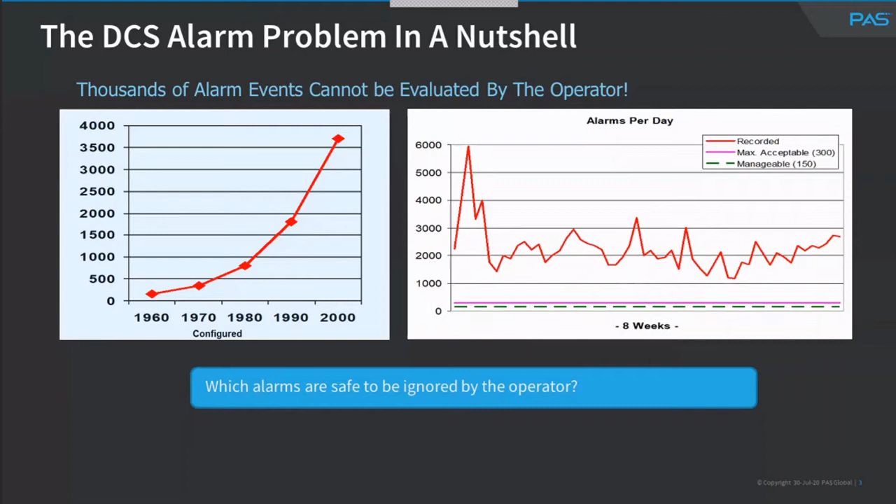Now, if you go to some control rooms in factories, you would find operators getting alarms continuously, and clearly they have no way of knowing which alarms to ignore and which to respond to. The second issue we found is that operators receive alarms at a very high rate — we call this an alarm flood. Alarm floods occur when the alarm rate exceeds 10 alarms in 10 minutes. 10 alarms is not a lot, and 10 alarms in 10 minutes means the operator would immediately start ignoring alarms 10 onwards — alarms 11, 12, 13, 14, the operator will forget about those. In this particular example data, the system was flooded for 6.9% of the time, meaning your process alarm system was not available for 6.9% of the day. That's a very, very high amount of unavailability. Typically, when we design a control system, we're looking at availabilities of 99.99%.

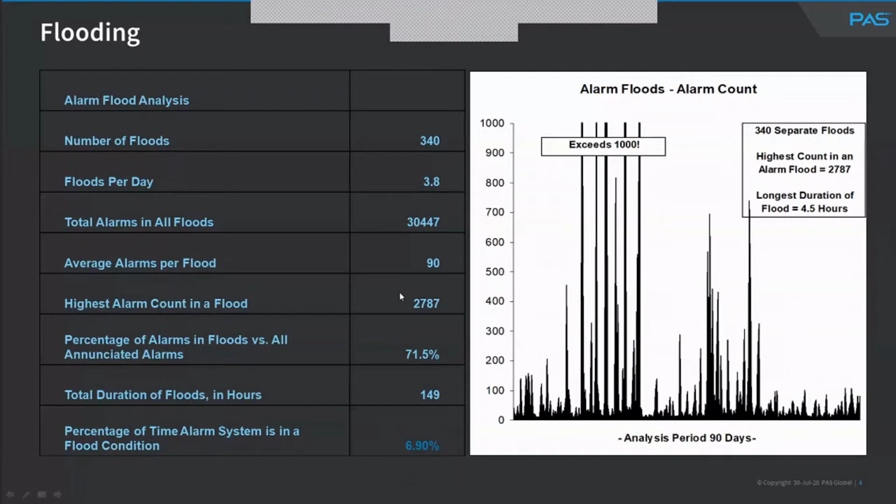In particular, it was a stale alarm on the level of the column, and we'll look at stale alarms going forward. But what we do realize is something needs to be done about this problem. Companies like PAS have been operating for about 20 years now, looking at alarm management, but the solution to the problem remains elusive. It's not an obvious solution, and it's not a solution you can put into a textbook, because it involves a lot of other factors that are not purely engineering kind of factors.

So let's get stuck into our case study, which is quite interesting. What we have here is a surge drum with the input flow to take the surge. We have a level indicator. We have a pump with the start permissive at 35%, meaning the operator cannot start the pump until the level is greater than 35%.

The pump trips at 30%. The trip was included because the expectation was that the supply flow would drop periodically more than once per annum. If a circuit is expected to operate more than once per annum, that circuit is considered a control circuit, not necessarily a trip circuit. We have a discharge pressure on the pump to tell us what the discharge pressure is, and we have a flow controller to tell us what the flow to the subsequent downstream unit is.

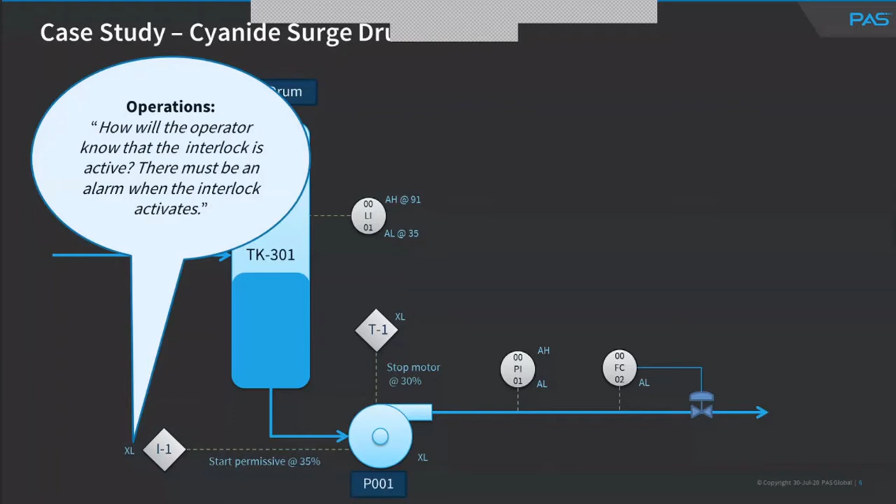Control systems will say, we always alarm at the trip point and at the highest priority. You'd find this in specifications of major oil companies, oil and gas, mining, and so forth. We always alarm at the trip point, that is what they say.

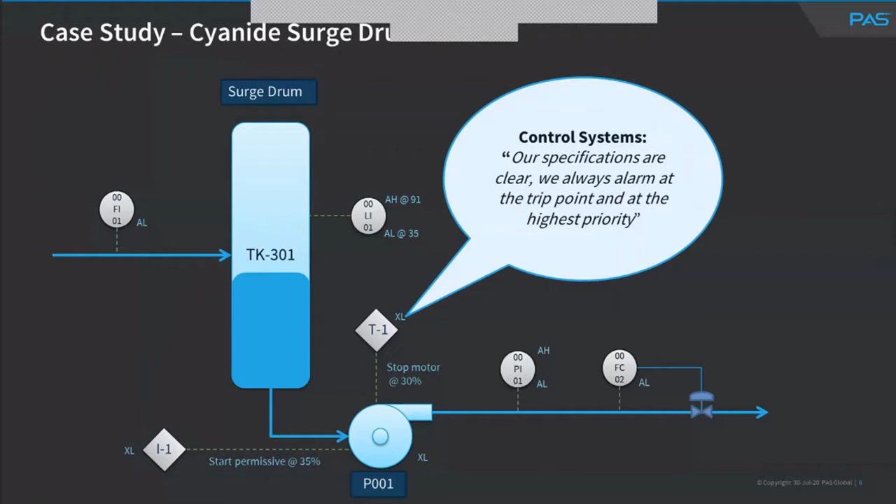The next group is rotating equipment, and they make a good point. They say the supplier of the pump has specified an alarm at 45 kPa. So we add that alarm. We cannot argue with the supplier of the equipment, of course.

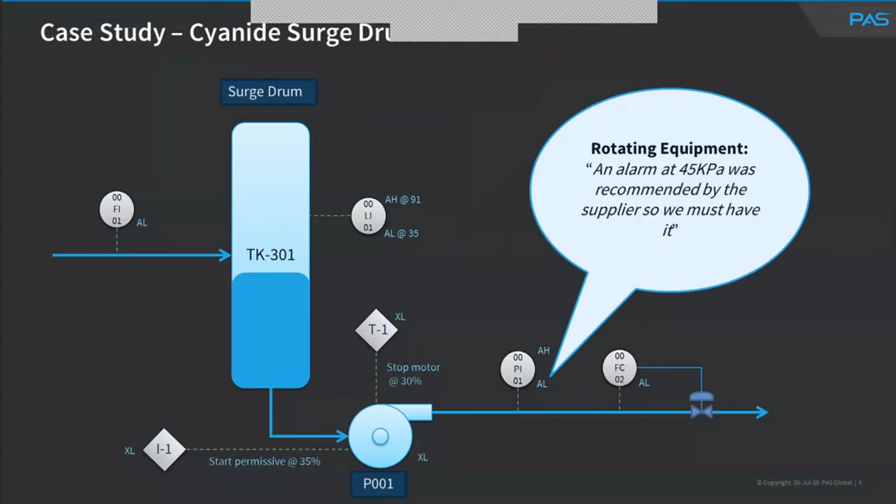And the process safety people speak of RCA, meaning root cause analysis, recommendations, where we need to have a low level alarm on the tank, and it's specified at 35%. So that alarm is included.

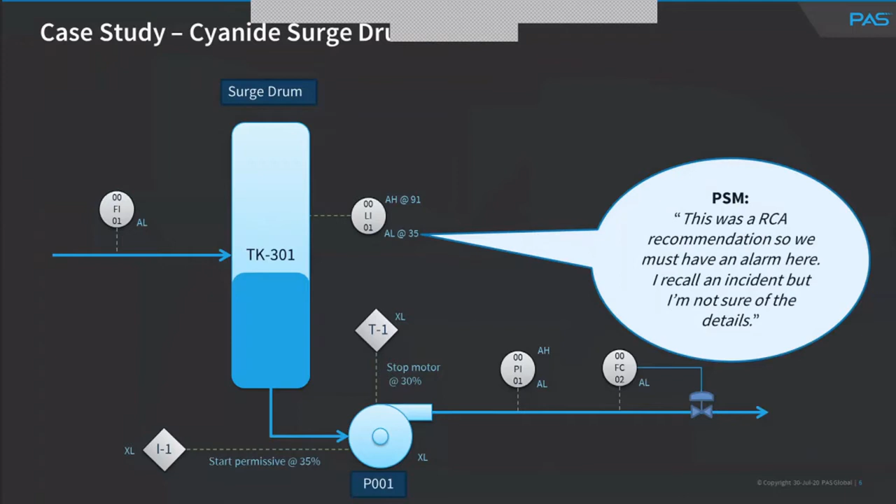And it's always the project manager that speaks last. The project manager sends an email to say, we should always have alarms on pump stops. So every one of these participants have really good intentions, in the sense that they're worried about different things and they're worried about outcomes that would actually cause harm.

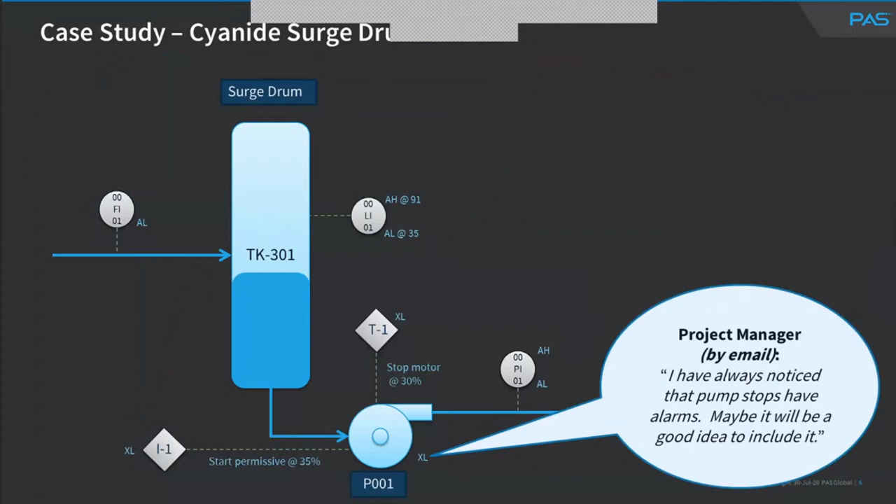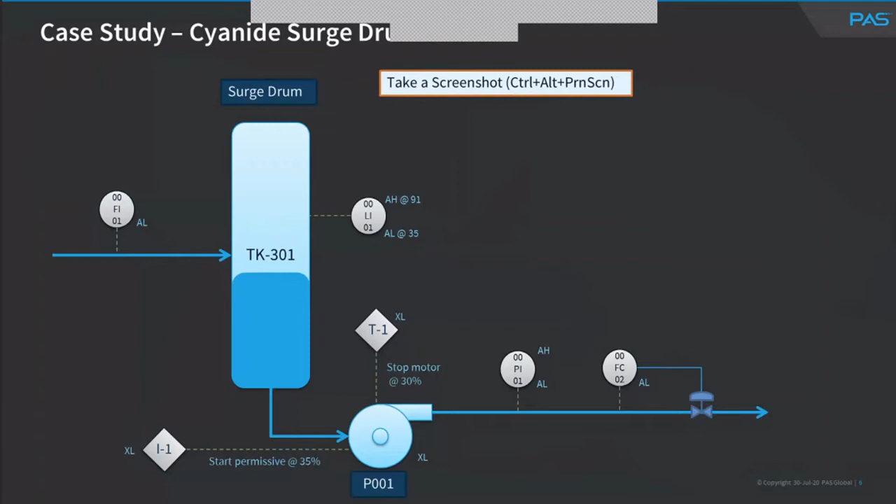So we end up with a situation like this. I advise you to take a screenshot, because I'm going to branch off into another software, a simulation software, to see the effect that this type of alarm system would have on an operator. So everyone felt really good after the study. They all slept very well at night because they believed they had given the operator all the tools needed to protect the plant.

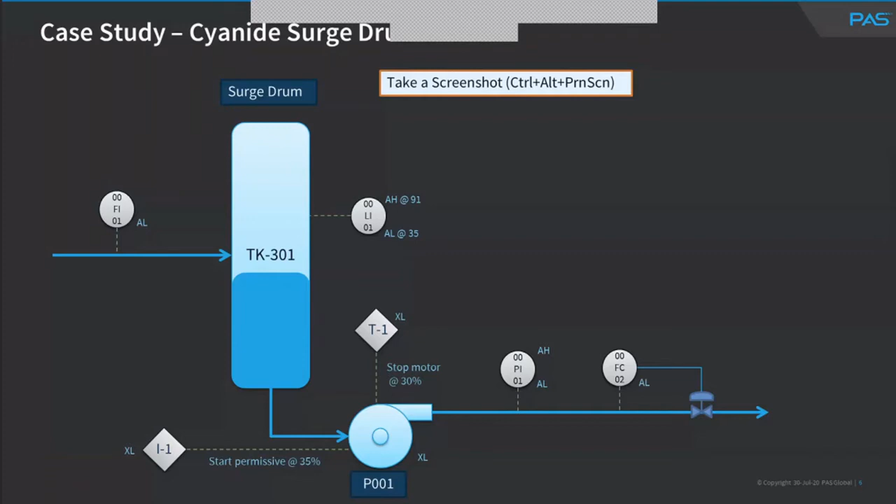So this is a dynamic simulation of the same facility. I've inserted a control valve here to shut off the suction flow. Let's see what happens when a perfectly normal condition occurs, and that is loss of supply. So the event we're talking about is loss of supply into this particular vessel.

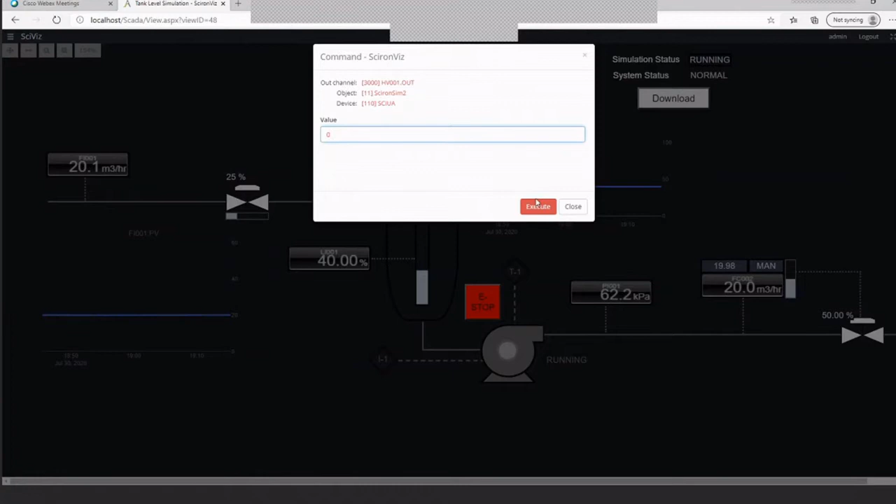So now that I've reduced the flow to zero, you would notice that the tank level will start dropping. The first event that would happen is the interlock activating at 35%. Here we go. And the next event that would occur is the pump tripping at 30%. Here we go. The discharge pressure has dropped and the flow has dropped to zero.

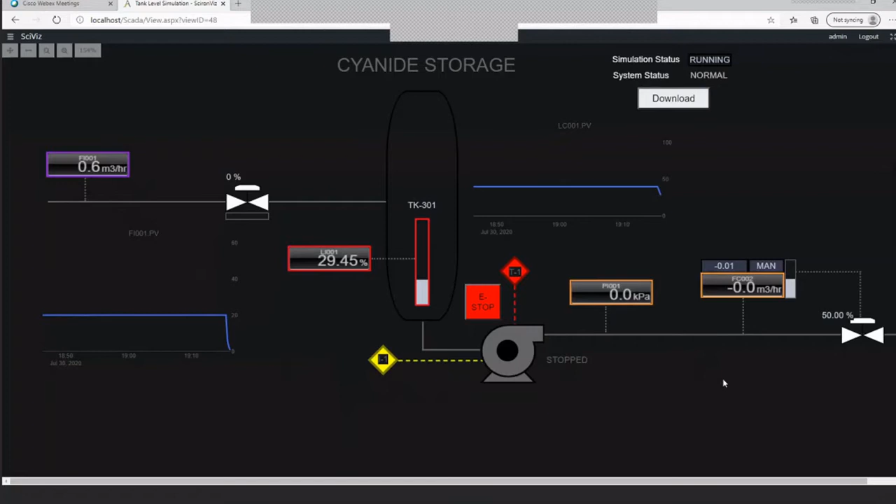You'll notice that in this particular sketch, we have 1, 2, 3, 4, 5, 6 alarms that have informed the operator that something's happened. Yet there's nothing unsafe or abnormal about this condition, because the plant designer wanted all of this to happen. Nothing that has happened so far is abnormal.

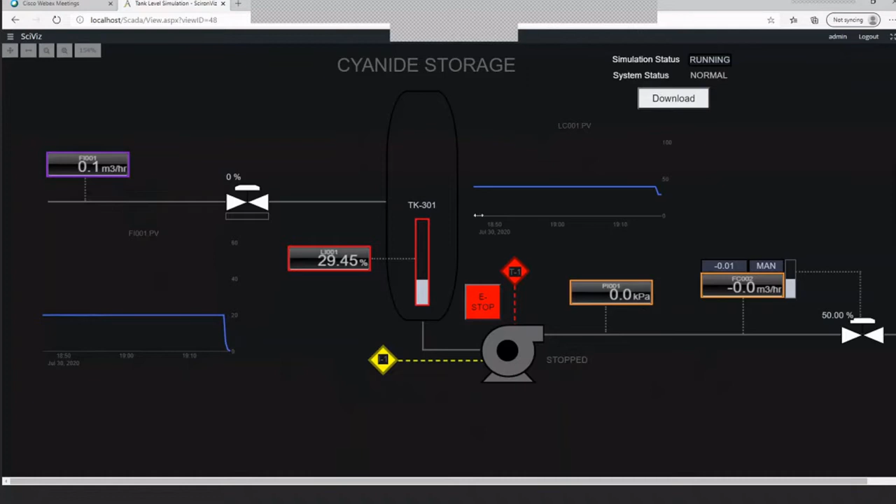If you look at the operator's alarm display, you will notice that his alarm panel has lit up like a Christmas tree. But yet, he has no actual action to take. There's zero action for the operator. All he has to do is acknowledge all these alarms.

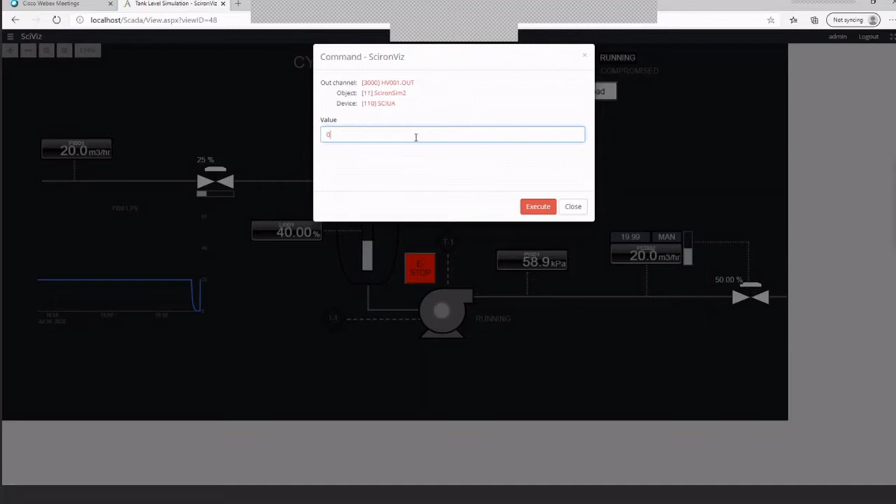Let's go back and talk about the real danger. I'm going to reset the simulation and talk about the real danger. So we rerun the simulation, but this time we have a fused relay on the pump, which means that even though the level drops, the pump does not get the stop signal and continues operating in a dangerous condition.

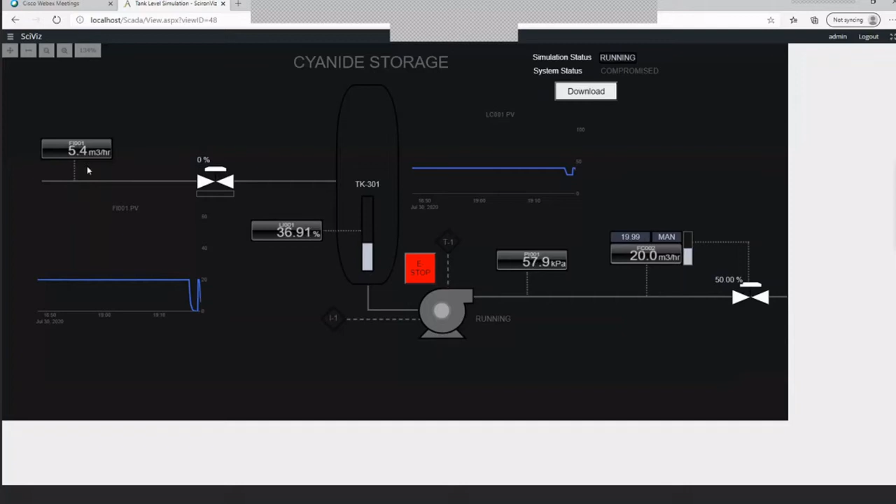So again, the moment the flow drops to less than 5%, 5 meter cube per hour, the operator is immediately worried about the downstream plant, so he would probably move off this page. And look what happens. Operator has received many alarms. Yet, because of past experience, the operator will not respond to these alarms. And the pump will run dry, creating a dangerous condition. In this case, even the e-stop will not work because it's a fused relay.

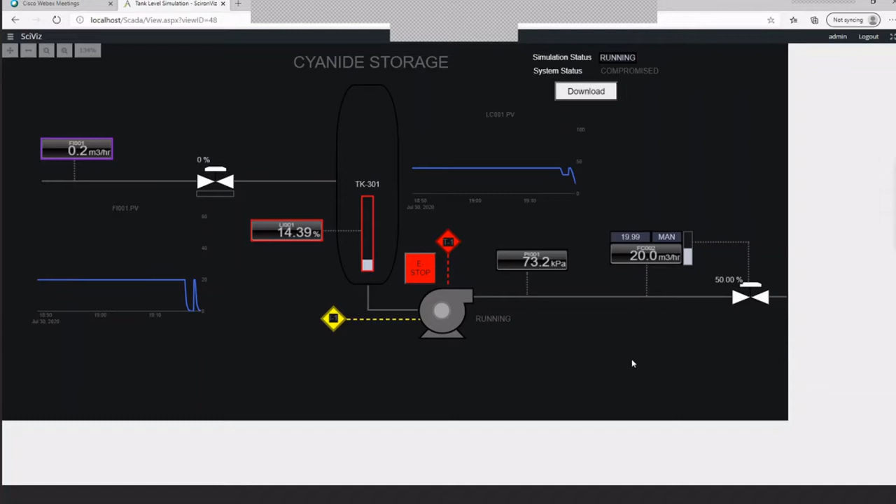So the only way for the operator to stop this is to go outside and manually stop it to prevent the incident from happening. So what we find out from this whole exercise is that even though we seem to have a lot of alarms protecting the plant, the alarms sound, but the operator has no actions for a normal occurrence. And when the actual problem happens, we will not notice it.

If you look at the alarm summary again, you would see that there's a whole bunch of alarms, yet it's very unlikely the operator will pick up this problem. So right at the end, we'll go back and revisit this issue with the correct alarm setting.

So back to our slideshow.

What lesson do we learn from this whole thing? Well, it seems like this guy, Henry George Bohn, knew a thing or two about alarm management. He says the road to hell is paved with good intention. Every single participant in the meeting believed that they're doing a good thing. And in the end, we realized that it actually did not help the operator at all.

The second point we learned is from Master Yoda from Star Wars, and we always turn to Master Yoda when we need assistance. Train yourself to let go of everything you fear to lose. Every participant believed that if they do not put in their alarm, then they would put the plant at risk, and it allowed them in isolation to sleep well at night. But what we learned from this whole experience is that alarm management is a behavioral issue. It's one of culture and less of engineering.

So if you look at the work process of alarm management, it's quite complex. There's alarm philosophy that's required. There's a whole bunch of operational activities that have to happen on a monthly basis. There's design work that has to happen. And there's periodic system audits that have to happen.

There was an operator action for the flow, by the way, but for the tank, there was no action. And most of the alarms were centered around the tank.

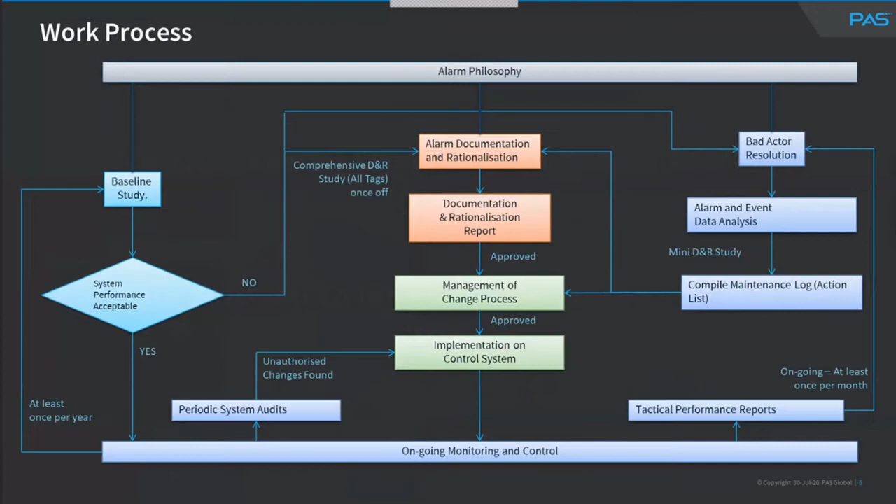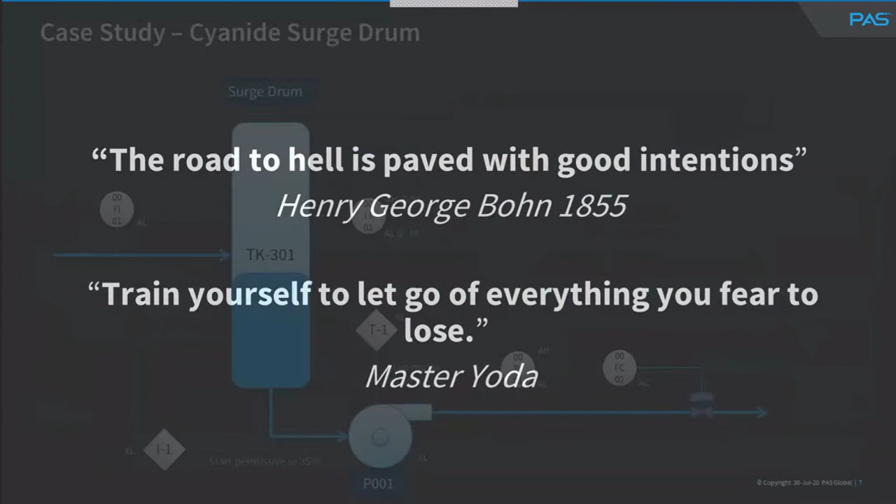Second commandment: thou shalt only alarm if the situation is abnormal. Let's go back and have a look. What was abnormal about the situation? Yes, the flow dropped - that was abnormal, and there was an alarm for that. But whatever happened after that was perfectly normal and expected and should have happened, and happened as it should. We noticed the level started dropping, the level alarm came up, but it shouldn't have come up - the level started dropping, the pump stopped, and so forth. And that's really the second commandment.

The third commandment is probably the commandment that gives the biggest benefit: you shall not duplicate alarms. No two alarms shall have the same cause event. In order to meet this requirement, you need to do some dynamic analysis to achieve this. And this is where there's a mismatch between the different safety studies that are typically done in the plants. A hazard study, for example, is a steady state analysis by and large. Yet hazard studies are often used as a mechanism to create alarms.

So let's look at this. No two alarms shall have the same cause event. So let's go back to our little example and have a look. We notice that, for example, this low flow can be caused by a multitude of factors. The first factor is loss of supply coming from the FI01. It can also be caused by this pump stopping, and it can be caused by this valve closing when it's not supposed to. So if you want to retain this alarm, you have to make a choice between the others.

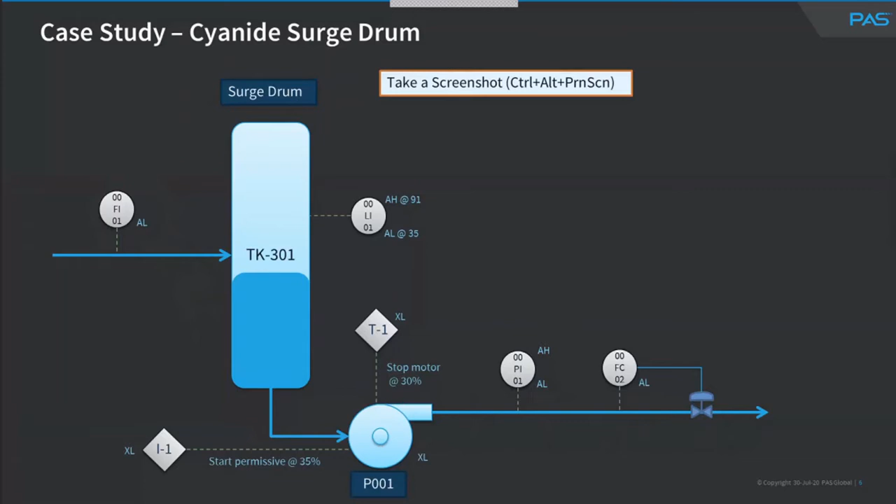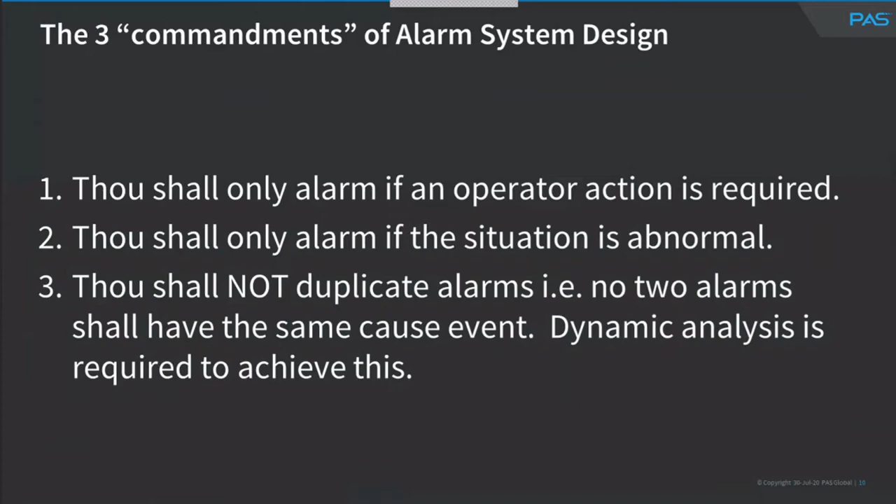In my view, the best one is the flow, because the flow will give you a very early indication that this flow will drop. Of course, the pump could stop as another cause, or the valve could close - we will discuss this in more detail. But that's how you do a cause analysis for your various alarms. And the moment you find that you do not have unique causes, you need to remove those alarms, because all they would do is give an operator two indications of the same event. And remember, we only have 10 alarms in 10 minutes in terms of our specifications.

So we can start with giving the operator absolutely no alarms, zero alarms, nothing - he just operates the plant. Guess what? There's no guarantee that he will miss every event, because he's now very vigilant, because he has knowledge that he has no alarms. It's like when I renovated my home, my alarm system at home was offline for a few days. In those few days, I was very vigilant. I actually didn't sleep much, because the knowledge that the alarm is not present makes me more focused on detecting the problem myself.

As we start adding alarms, the operator gets more information and is able to act based on these alarms that may come up. This is because the operator has so many points to look at that it's not possible for him to watch the entire factory, so we would start assisting him, and the chances of the operator missing a key event start dropping drastically. And we reach an optimization point.

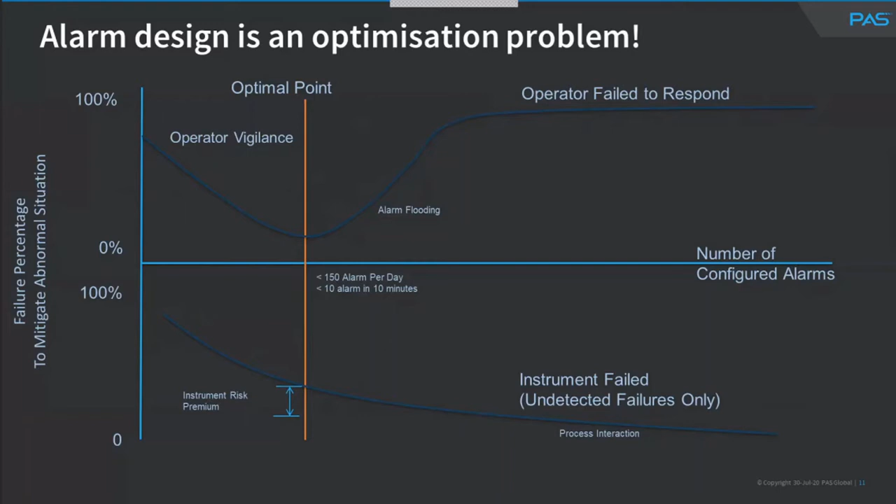I hope that I have given you guys a flavor for what alarm design actually is. It's an optimization problem where we're trying to minimize the number of alarms subject to certain constraints.

If you know all of this, why do we still persist and have this alarm problem? I often do this with many of our clients: we use a strategic framework to try and sort this problem out, as opposed to a pure technical framework. We find that many people's first go-to is software. They say, let's buy some software to sort this out. My view is that software will help, but it's not the solution. This problem is about understanding the culture of your company.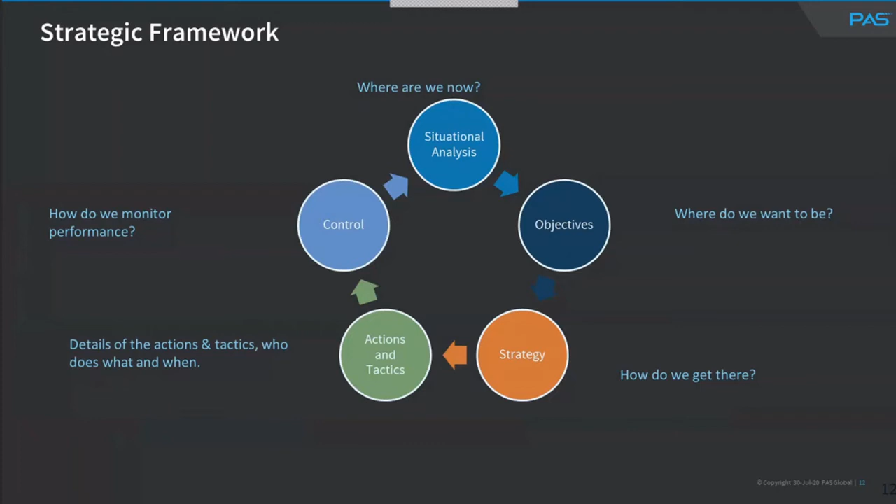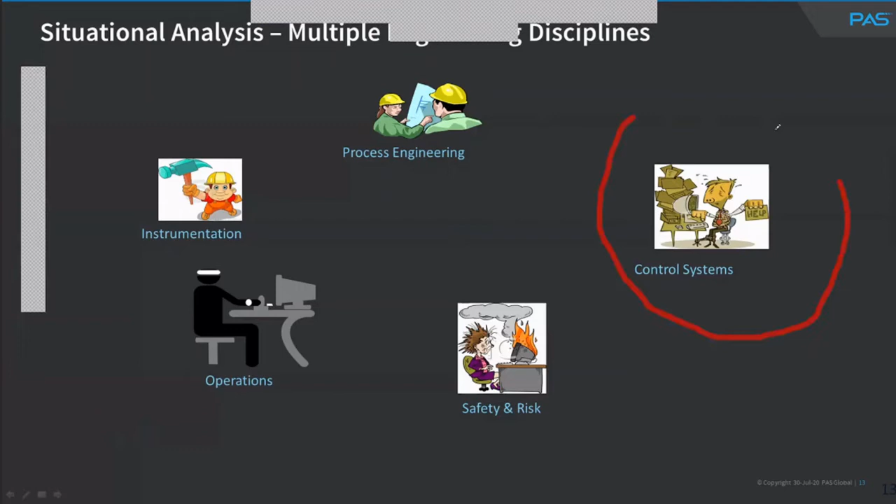Let's talk about what we mean by situation analysis. Let's understand the environment we work in. We work in a multidisciplinary engineering environment. Yes, the problem seems to manifest itself on the control system - that's where it manifests itself. But the problem is actually a result of decision-making from many different areas: process engineering, instrumentation, operations, and safety and risk.

Each discipline wants to protect their own interest. No engineer or technician wants to be responsible for an accident by omitting an alarm, so they will all insist that they have the alarms in. Against that background, in order to solve this problem, we cannot just be control systems and instrumentation - it has to be a multidisciplinary approach. So that comes out of your situation analysis.

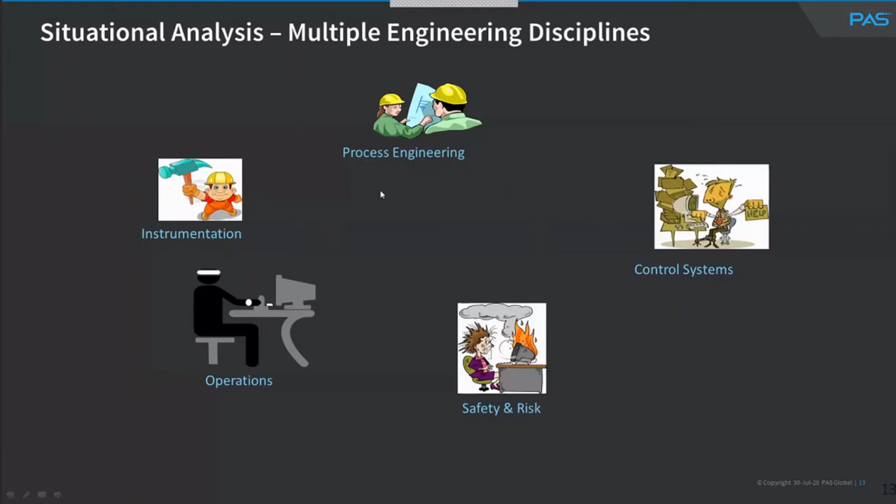The second point is about operating culture. We often find that operations typically ignore alarms with zero consequence. They disable alarms without addressing the root cause. And probably the worst effect is to wait for alarms to occur before responding.

I had this experience at a factory in Saudi Arabia, where the operator would set all the levels on the columns at 45 and 55%. So I asked him why he does that. He says once he does that at the beginning of the shift, he then waits for any level alarm to come up, and then he acts. That is not the correct use of an alarm system.

Because what happens in reality is that when you have a transient that runs through the factory, all the levels move. So instead of having one level alarm, he has about 50 of them to deal with. Alarms should only annunciate when the situation is truly abnormal or the underlying equipment has failed.

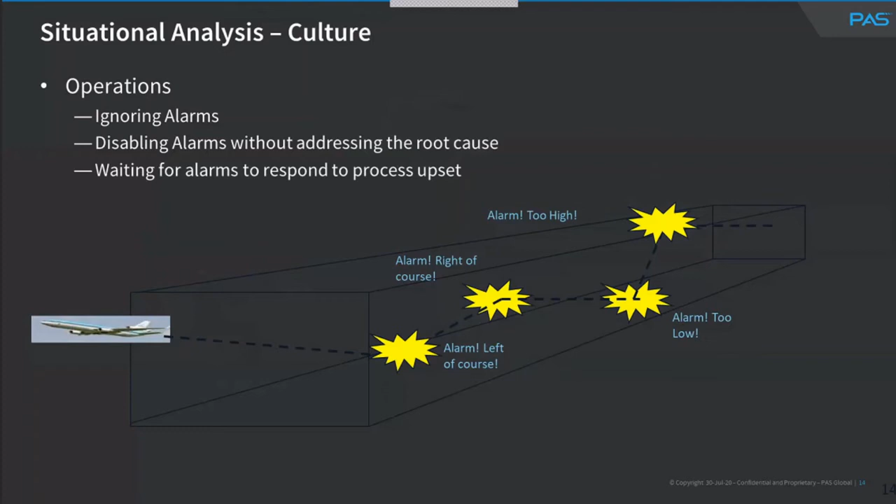Okay, so let's talk about the process department. The process department has a knack of adding alarms during risk review. They do this without realizing it, because in a risk review, like a HAZOP meeting, the easiest thing to do is to say 'safeguard, add an alarm.' It's probably the easiest thing to do. They tend to duplicate alarms.

During incident investigations, they would add alarms because you have to put something down in an incident investigation. So you just add an alarm in there because you have to have some recommendations, and it doesn't cost anything, it's cheap, and so forth. And in doing so, they're creating this problem, and they set activation points that don't make sense.

And finally, with control systems - control systems are not set up with deadbands and delay timers. There's configured duplication, and range settings are all off. So the problem originates from multiple different people.

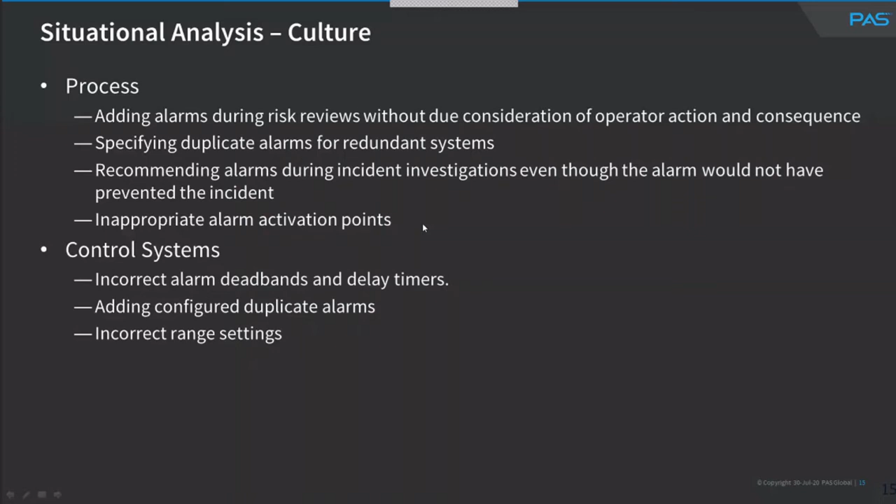In terms of our objectives, I think the objective is very simple: reduce the annunciated alarm rate per operating console to an acceptable limit as specified in EEMUA 191 and ISA 18.2. Those two specifications really tell us where we need to be for safe operation.

And we need to bring about permanent change in the engineering and operating culture such that the gains are maintained in the long term. In the short term, I can reduce your alarm count like you won't believe, but unless your culture changes, those alarm counts will not be sustained. The problem will return in a few years, and some companies have been grappling with this for 20 years plus - that's because the operating culture has not changed.

If you look at our strategy, it's basically very simple. We have alarm system design, which we discussed. We have bad actor alarm maintenance, which we are going to talk about today in more detail, and we have training and awareness.

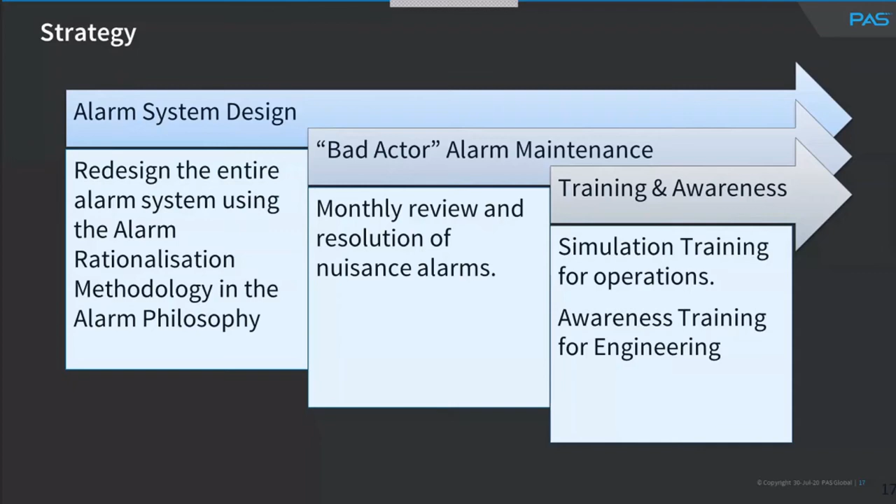Who are bad actors? These are some of the bad actors that I know. Alarms are repeatedly annunciated without conveying any new information to the operator. That's the definition of a bad actor.

So why are bad actors so bad for us? Bad actors are bad because they create a culture where the operator acknowledges an alarm without actually doing any form of analysis or corrective action. It becomes a norm to just acknowledge alarms. And you notice on the operator's panel, the acknowledge button is the one that's worn out. It's literally worn to the bone where there's no keyboard left. And that's because the guy has received so many alarms that he has no way of solving the problem.

The DCS loading will increase, or PLC bandwidth, and critical alarms are lost in the sea of bad actor alarms. So in our case, we had alarms, but the critical one, nobody noticed. And you can have some adverse consequences with regard to environment and safety. So there's a real issue with these bad actors.

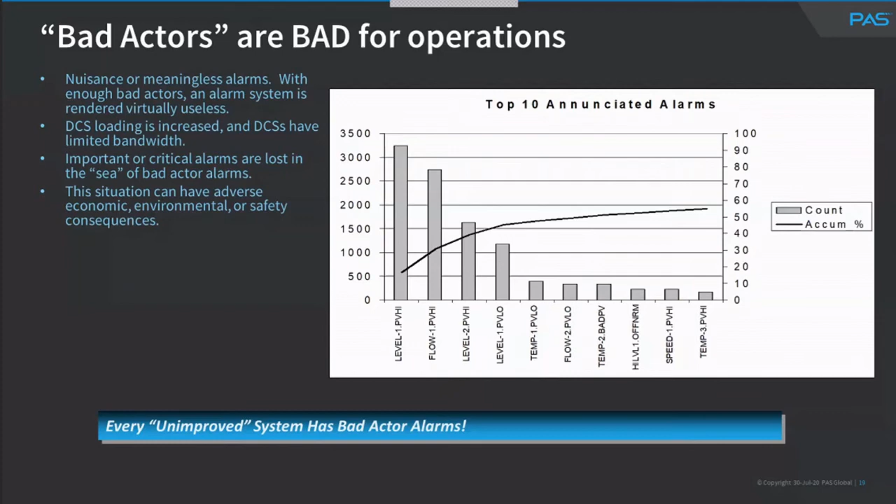Where do bad actors come from? I'm a fan of Bollywood, not Hollywood. That's just the way it is. But yeah, we get some bad actors from Hollywood.

Control system configuration is one of the issues. Process design, the second point, and instrument malfunction. And I often get annoyed when it comes to process design, because you cannot alarm your way out of a bad design. If the vessel is too small for the holdup, the alarm system is not going to help you. You need a bigger vessel or a smaller pump or whatever else you need, but the alarm system cannot solve that problem.

And of course, there's instrument malfunctions that will contribute to this. And because instruments are electronic in nature, they have the potential of generating millions of alarms, for example, on a loose connection.

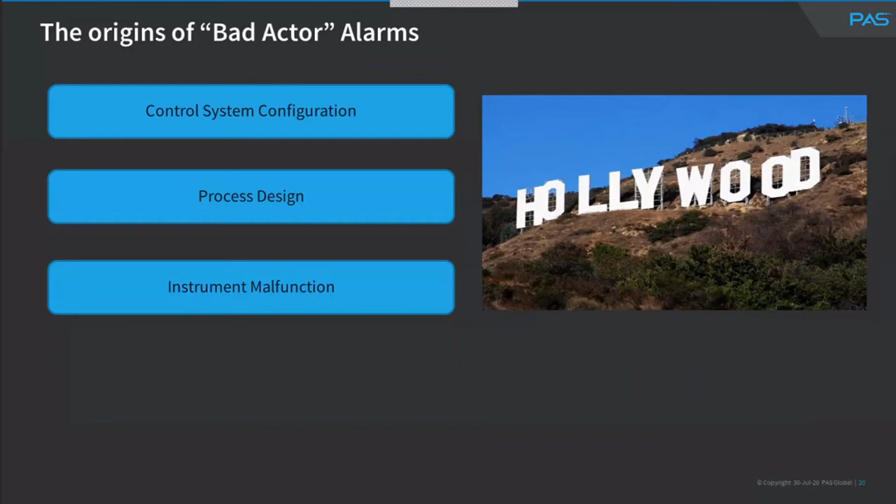Let's talk about the different types of bad actors. So the first type is a chattering alarm. The definition of chattering is an alarm that annunciates more than 3 times in 1 minute. It's very unlikely, unless you're flying a fighter aircraft, that the process would move at that speed. Most processes would not move to generate new information in a minute.

We have fleeting alarms. These are chattering alarms that arrive and go away and seem to come back the next day and leave us again and come back a month later. We have a thing called stale alarms. These are alarms that stay in the alarm log for more than 24 hours. We have duplicate alarms that are configured and duplicate alarms that are dynamic.

Duplicate alarms do not convey new information, hence must be removed. Then we have diagnostic alarms. In today's world, with the technology that we have, Foundation Fieldbus, we have smart instruments, and they have a potential of generating thousands of diagnostic alarms. While those may be important for the instrumentation people, for the operator, they are meaningless and should be sent to different people.

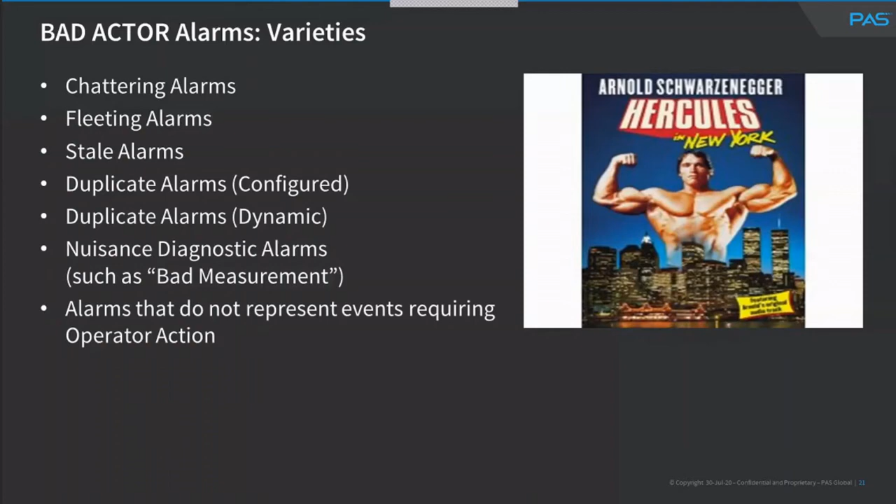And alarms that do not represent events requiring operator action. If there's no operator action, there's no alarm. And that is the first commandment.

So how do you go about addressing a bad actor problem? We've broken it down into a few steps. The first step is you need to analyze your alarm journal. And out of that analysis, you would get some kind of identification of the bad actors. That's a list of actions that you are going to take to fix the problem.

The reason you would use software is because analysis of this journal can be quite tedious and time-consuming. It's always good to have handy tools to actually help you analyze this data quicker. We don't have endless time to do this. There's a limited amount of time to do this. So we want to do it as quickly as possible.

Once we have identified these bad actors, we add them to an action item list. And that action item list is subject to review at a multidisciplinary forum. That forum includes instrumentation, control, process, mechanical, and whoever else is needed. And in that forum, we hone in on the root cause of this problem. We then get the modifications approved and implemented.

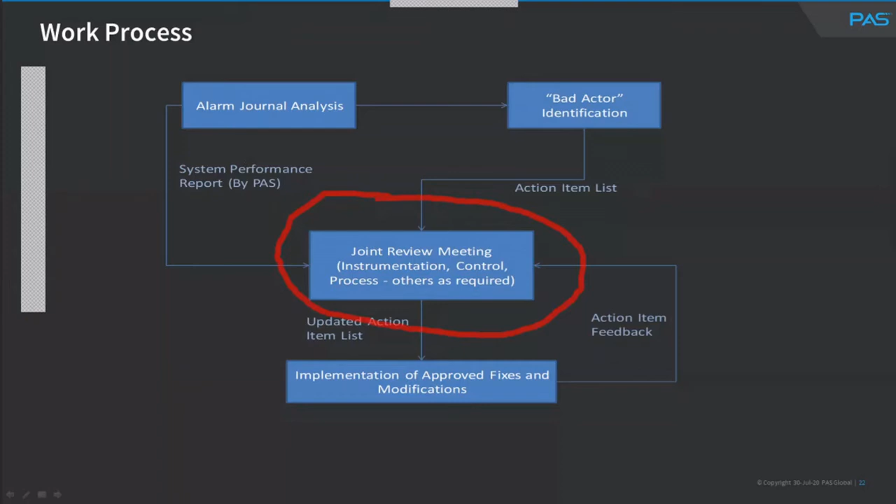The most important thing about this chart is that once an item enters your action item list, it's not allowed to leave until you've done something about it. Many companies run action lists daily or between shifts, and if an alarm isn't a problem anymore, that item gets removed from the list, only for it to happen again at a future date. The moment you detect a tag as a bad actor, it has the potential to become a bad actor again, so you need to address it once and for all so it doesn't happen again.

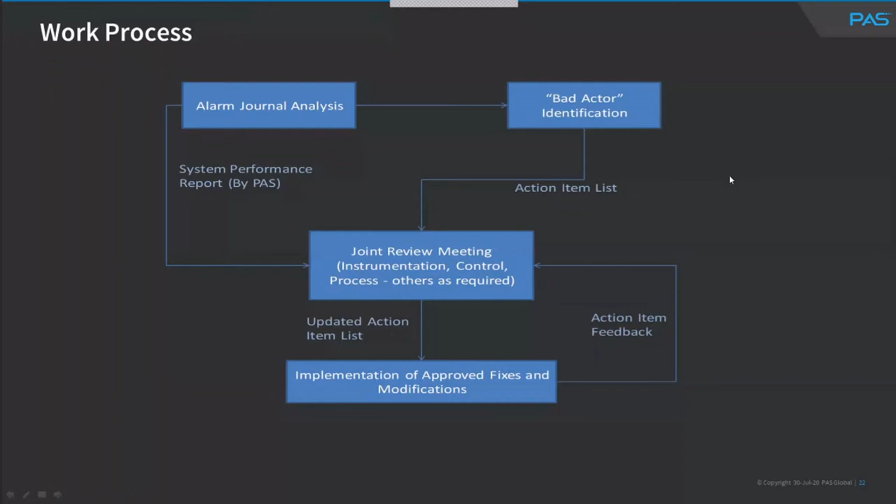Let's discuss how you classify bad actors. First, you need the event data from your DCS: when the alarm occurred, how often, and so forth. But just looking at that isn't enough. You need historical analog data to understand the context under which the alarm was generated, equipment data sheets to understand the consequences of that alarm, and the process design, because that tells you whether the alarm resulted from poor design or instrument malfunction.

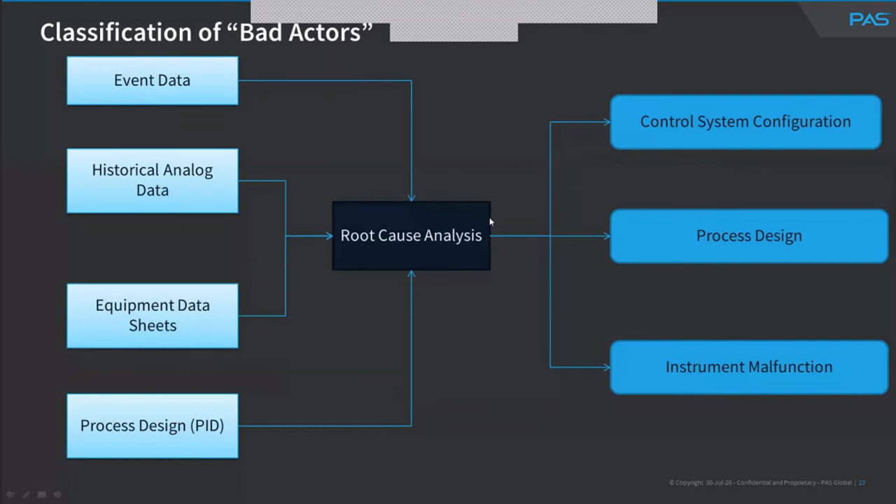Once you've done your root cause analysis, the action is then assigned to the different teams to resolve based on what the root cause of the problem is.

Chattering alarms are considered the worst offenders. The solution for chattering alarms is well documented and well known: you need to assign a proper deadband, delay time, process value filtering, and so on.

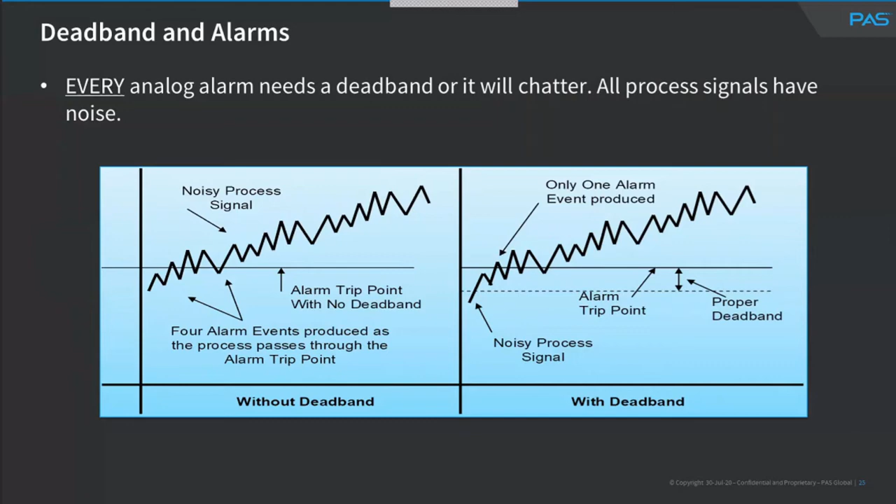Let's look at some cases, starting with the deadband. Without a deadband, the operator will get maybe four alarms for the same issue. With the deadband, the operator gets just one. It's as simple as that. By default, deadbands should be configured on almost every signal in your factory, and this gives a big benefit. But a lot of factories are dated, so you have to go back retrospectively and apply this.

Let's talk about the alarm point. There are two reasons to specify an alarm point: operational efficiency and equipment protection. We're only going to talk about operational efficiency today, but equipment protection is just as important.

First, we need to confirm that the measurement is self-regulating for load and servo responses. What do I mean by that? If you have an integrating signal, like a level, it will never achieve steady state except if it runs at a constant increase or decrease in velocity. So we're talking about things like flows and pressures. We have to verify that the signal at steady state is normally distributed - this doesn't apply to signals that aren't normally distributed.

We then calculate the mean and standard deviation of the signal at steady state, a standard statistical tool. The alarm point should be at least three standard deviations from the mean, because we want to minimize false positives to less than 1%. This is a little recipe for deciding where to set the alarm point for operational efficiency. I say operational efficiency because often the alarm point has to be set very close to a limit in order to achieve maximum production.

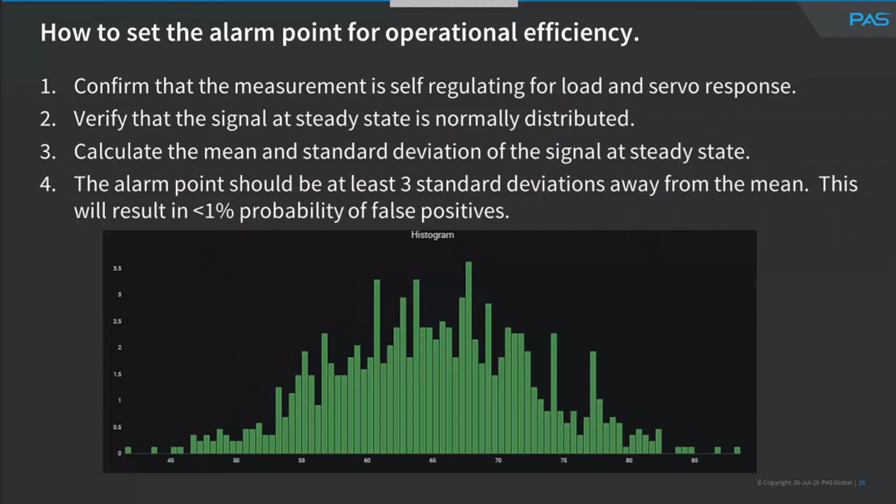For switches, we don't have deadbands, but we have delay timers, and that's all you need. The delay timers are very effective at minimizing the alarm. There's a standard table in EEMUA and ISA 18.2 that gives you the dead time and deadband amounts - I normally just use the defaults unless there's a reason not to. I don't believe there's a reason to do rigorous analysis to figure out the delay time.

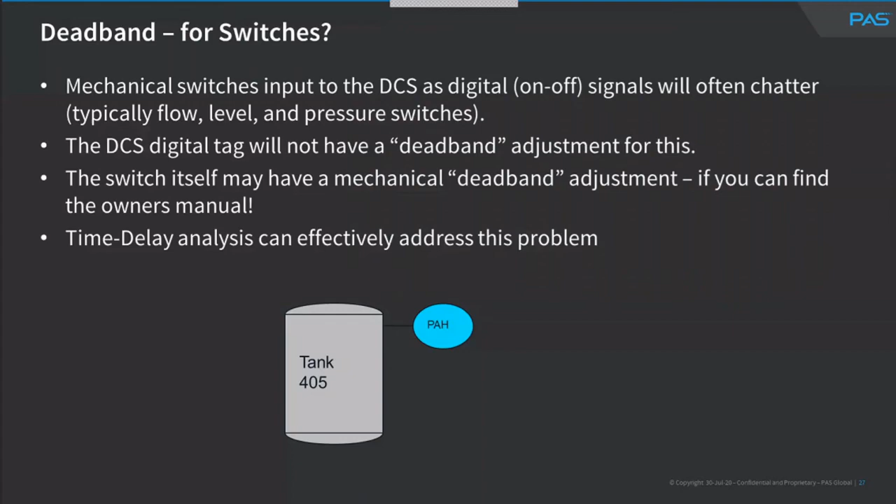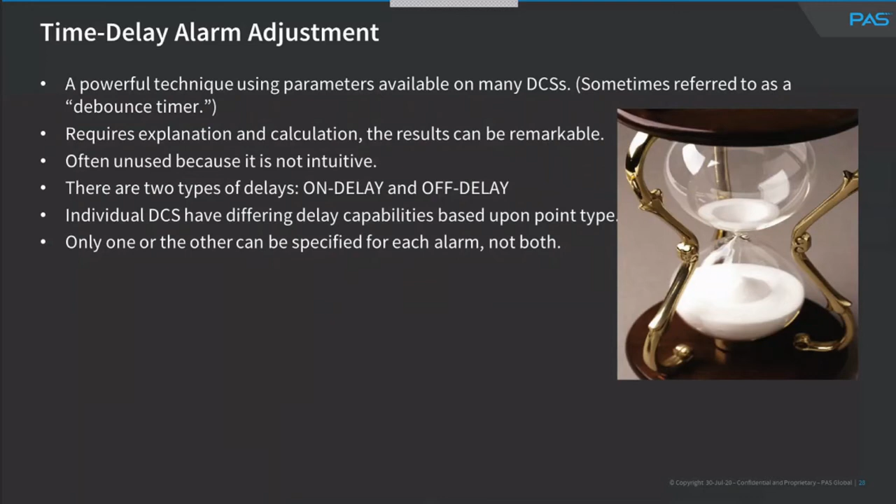Let's talk about process design. This is an actual example of a real situation where a root cause analysis study suggested we have a flow alarm for low flow on this line, because they needed a constant sweep off this line.

If you look at this carefully, the action of the controller will move this valve up and down and create much noise in the flow signal because the flow is dependent on the variable orifice that's here. What ended up happening is the operator of the plant had literally thousands of alarms originating from this tag and simply disabled the alarm. In disabling the alarm, he disabled all the recommendations of the root cause analysis of this particular problem.

What I'm saying is no amount of deadbanding can fix this. This is a process design issue. It can only be solved by a process design change. Assigning alarms where the operator has to act every minute is ridiculous. The correct solution to this problem was to clamp the valve output to not close less than 3%,

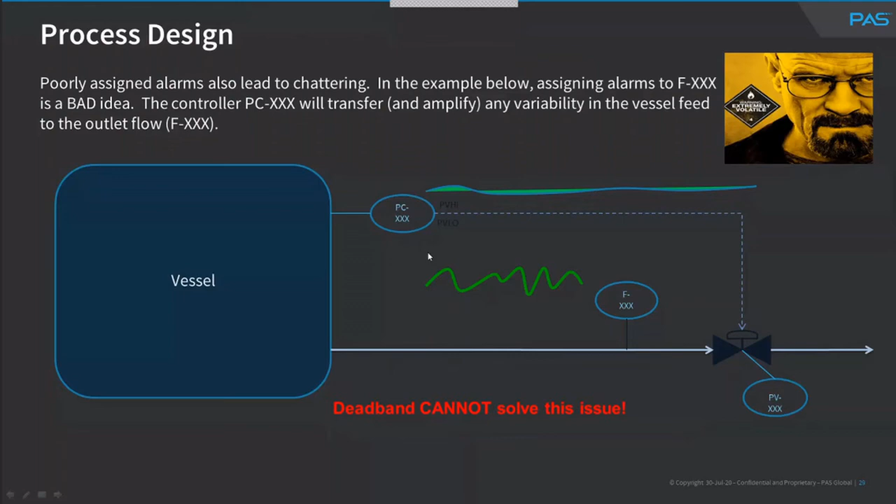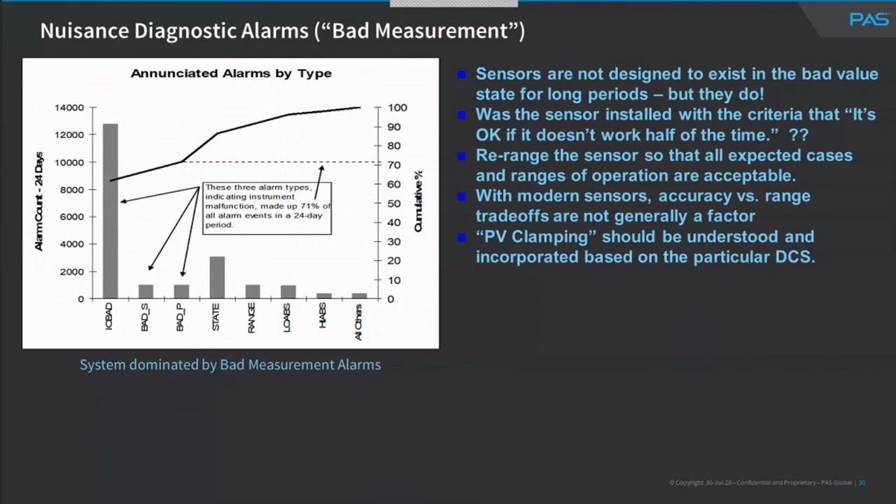Let's talk about nuisance diagnostic alarms. I'm going to skip this slide because it doesn't convey much and go to the next one, which is interesting. People ask me, why do you get so many alarms in shutdowns from bad instruments? It's a result of a simple physical property of gases. You see, when we measure flow, we have a restriction orifice and a differential pressure measurement that's subject to a square root extraction.

When the plant is off, the sun is shining and heats this side of the pipe, the gas will move that way, end up here, creating reverse flow. And that sends the instrument to produce a signal that's less than 4 milliamps. In fact, it drops below the setting that the DCS vendor or the PLC vendor has specified to detect a wire break. So it may drop to 3.3, 3.2.

Most control systems have a low cutoff at around 3.5 milliamps. This problem is easily solved. You need to adjust the cutoffs or re-range the transmitter to cater for some reverse flow. Because of the square root extraction, this signal is really jumpy.

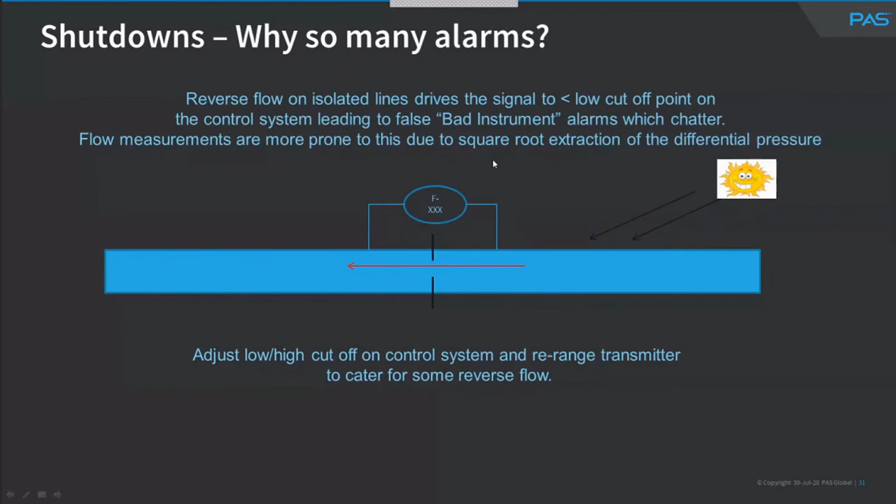Let's look at configured duplicates. In the control system, there's much programming and information is transferred from one point to the next point to the next point. You need to be sure to disable alarms at every step. Because when this guy goes into bad alarm, this guy will also go into bad alarm and so forth. So you end up giving an operator 10 alarms for something that actually is just one issue. I think that's where the control system people need to take responsibility and sort out the control system.

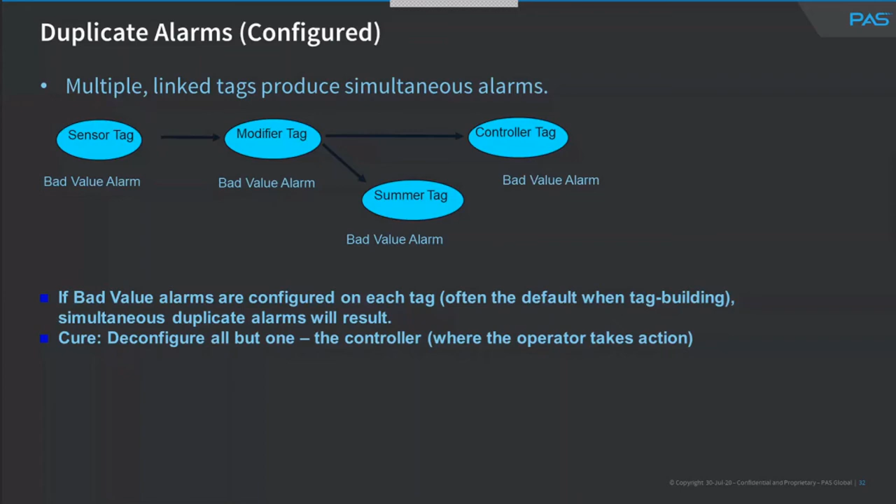The stale alarm is probably the most damaging and dangerous of all bad actors, because once an alarm goes stale, it cannot convey new information. So in the explosion I mentioned earlier, the level alarm went high and the operator continued to fill the tower. In doing so, because the level alarm was already high, he did not realize how high the actual level was. If an alarm is in your alarm log for more than 24 hours, it's violating the basic principle of alarming. It means that that's not a truly abnormal situation.

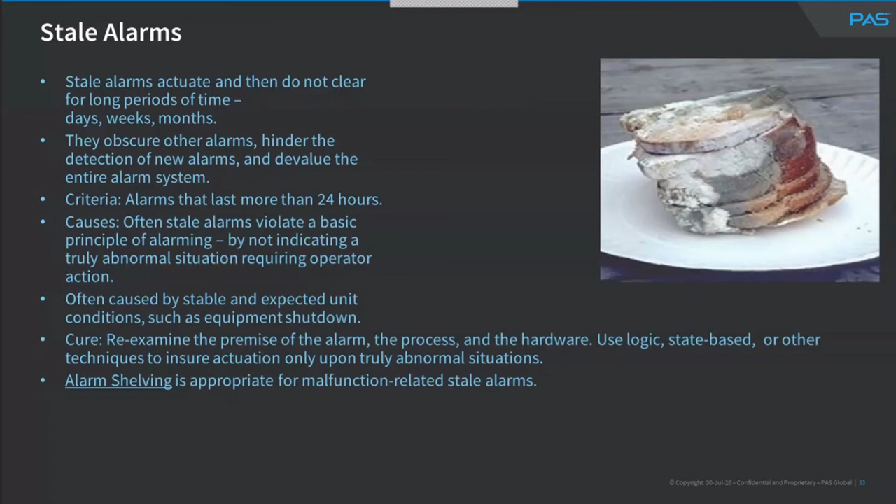If you can tolerate something for 24 hours, it's not abnormal. This is where you need to put some real effort into getting rid of stale alarms, because these alarms have caused quite a few accidents. Let's look at redundant equipment. I think the issue here is we expect the second pump to be not running for long periods of time, because that's why we have it. It's a standby.

So instead of causing stale alarms for your operators, consider doing something simple, like using a change of state alarm. In other words, when we change from running to stopped, that alarm will not become stale. Use logic functions. Here we're worried about this motor, but we're worried about less than one running, as opposed to each one having an alarm. Look at command disagree. Command disagree means if I've commanded this motor to run and it's not running, it will generate an alarm. Obviously, if I've commanded it to stop and it is stopped, it will not generate an alarm.

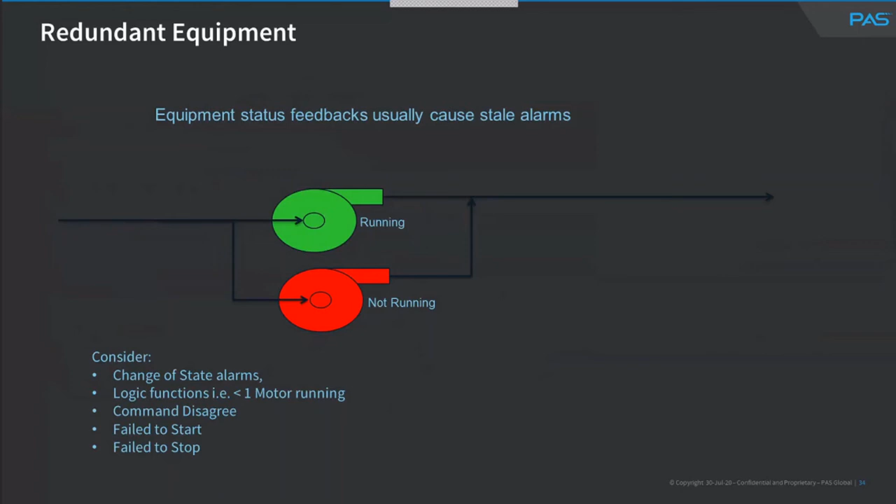And fail to stop and fail to start. Many operators use abnormal alarms instead of change of state alarms. And that really causes a lot of stale alarms in your plant.

If you follow proper methodologies and follow the work processes that we know work, you can achieve reductions of 50 to 90% in your plant. But it cannot be done unless you have a multidisciplinary team tackling the problem. I don't think people should feel that they are the only ones that need to do it, especially the control systems people. Often the problem ends up in control systems' hands, but it's actually not a control system problem.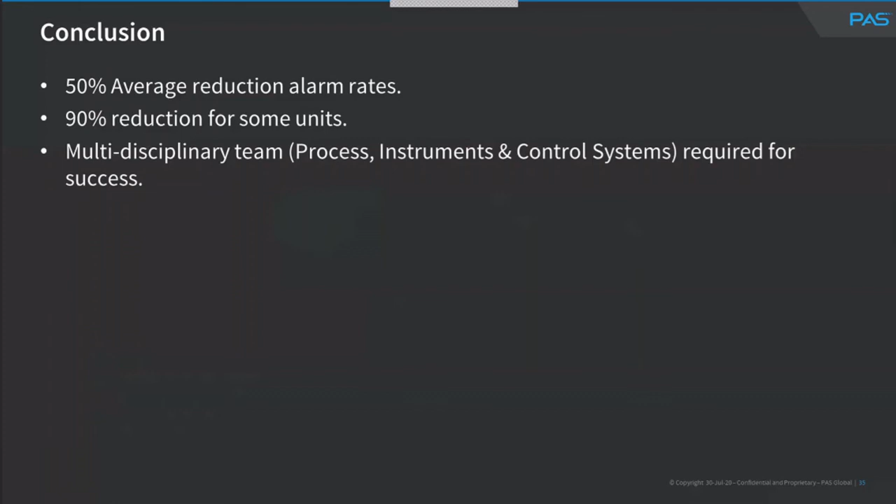So really that's where we are. Let's get back to our case study and look at the surge vessel. So after a bit of thought, we'll adjust these alarms. The first one that we need to adjust is the level indicator.

We'll adjust the level indicator to configure the alarm at only 26%, which is below the trip point. Does that even make sense? Well, it makes perfect sense, because it's a diagnostic alarm that if this pump does not stop, it will sound. You must remember, the moment the flow alarm sounds, the operator knows the level is going to drop. It has to happen, because if you're not putting mass into a vessel and you're taking mass out of a vessel, the level has to drop. It's science. It's conservation of mass.

How about the start permissive? Well, why do we need that unless we're trying to start the motor? When the operator is starting the motor, he will look at the graphic and he will see that the start permissive is either healthy or not healthy, and he will start the motor. Start permissive has zero value. There's no operator action to be taken.

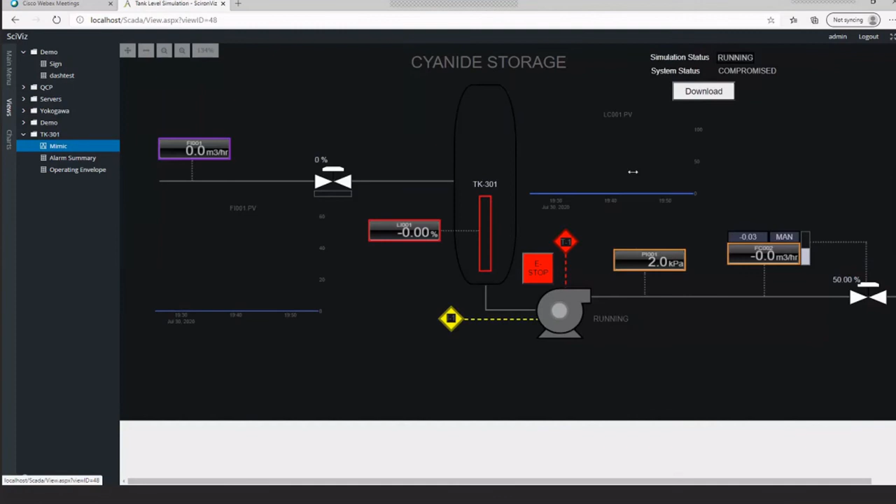If you look at my alarm summary, I have now added a low alarm at 26. I've retained my high alarm at 90. I've removed the discharge pressure alarm. I've retained the alarm on the flow indicator and removed pretty much everything else. So let's have a look and see what happens when we...

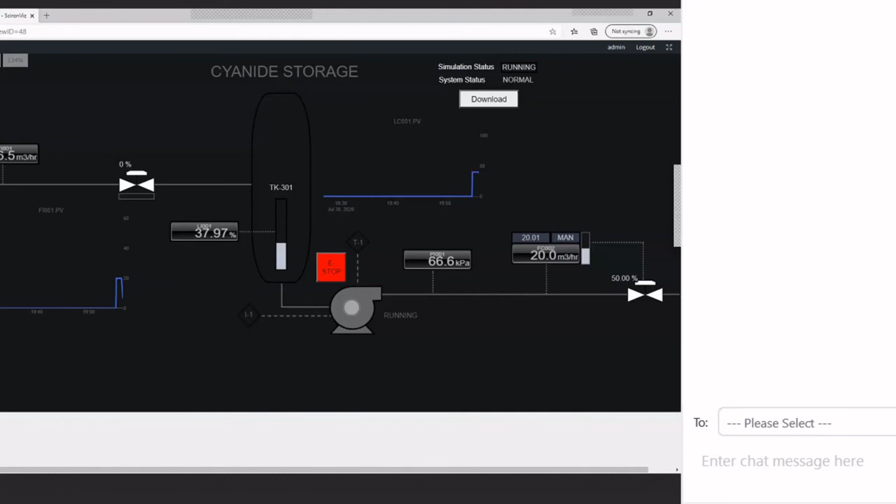flow, which is fairly normal occurrence, supply flow. So you're going to see a drop in the flow, and the flow alarm has sounded, warning the operator that there's a problem of supply.

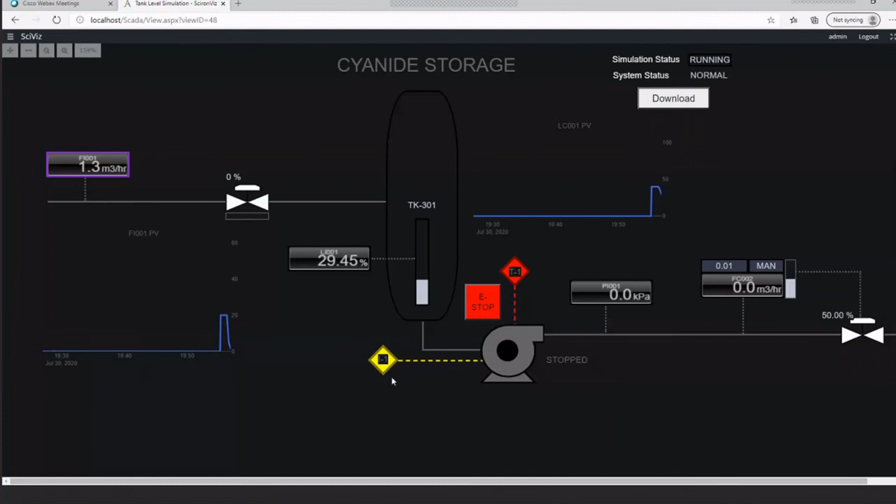The operator will immediately start looking at the discharge at the downstream units. This is not an alarm, just an indication. It's not an alarm, an indication. You can see there's just one alarm. If you look at our alarm summary, there's just one alarm. These are journal items. Pretty cool, huh? One alarm has told you that there's no flow. There's nothing wrong with the bottom of this vessel because nothing has gone wrong.

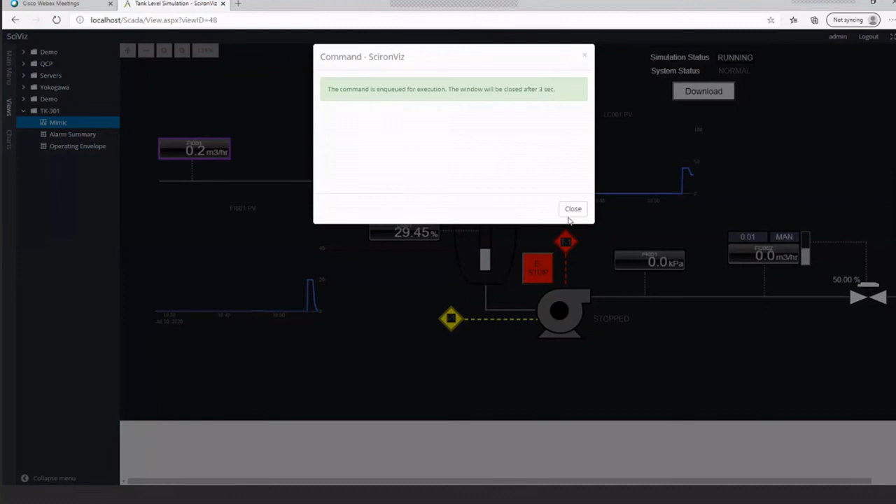Let's look at the case of where the pump does not stop in this case. And let's see what happens to our process under that scenario, which is a scenario that everyone was worried about when we did the design.

So the level will start dropping. At 35, the interlock will come on, but it will have no effect because the relay is fused on the pump.

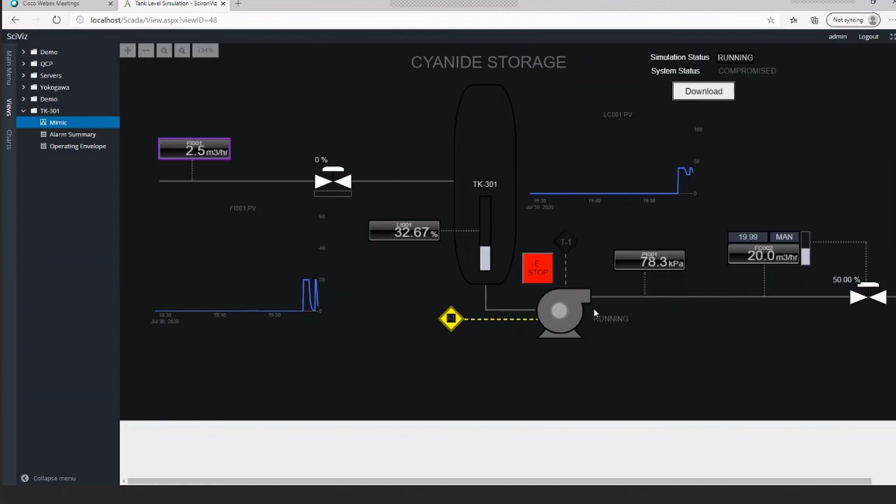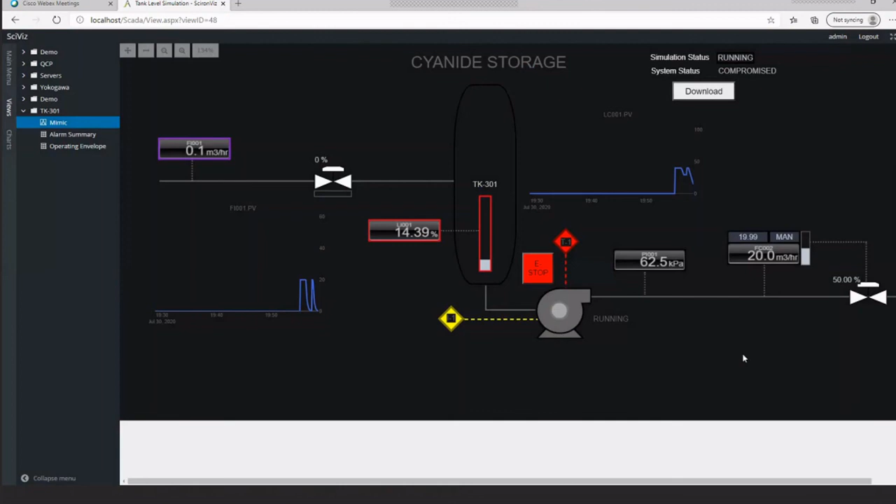The pump has not stopped, but the level alarm has popped up to give the operator an indication that something is going to happen if he does not act. If you look at our summary, it's just 2 alarms. There's a good chance the operator will pick up the level alarm and take appropriate action. In this case, it's actually stopping it in the field because the relay is broken.

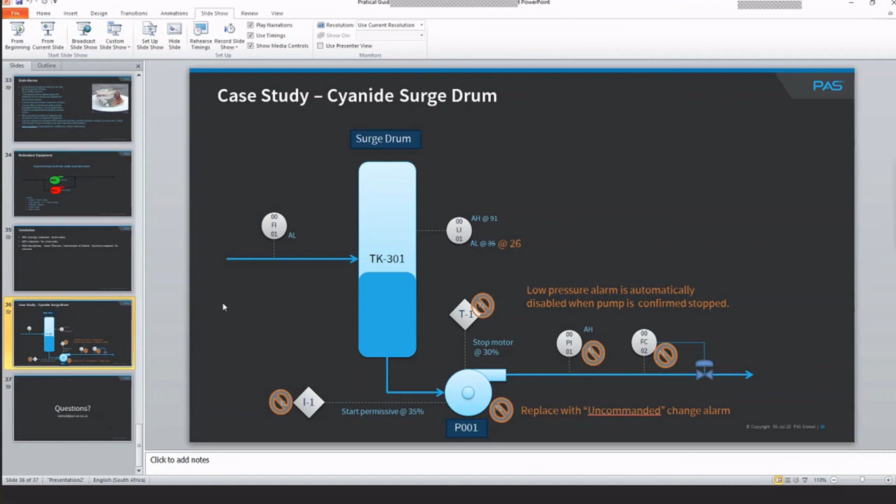So I'm not sure how you guys would have done this alarming. Alarming can be very emotive. But yeah, let's take some questions. That's my story.